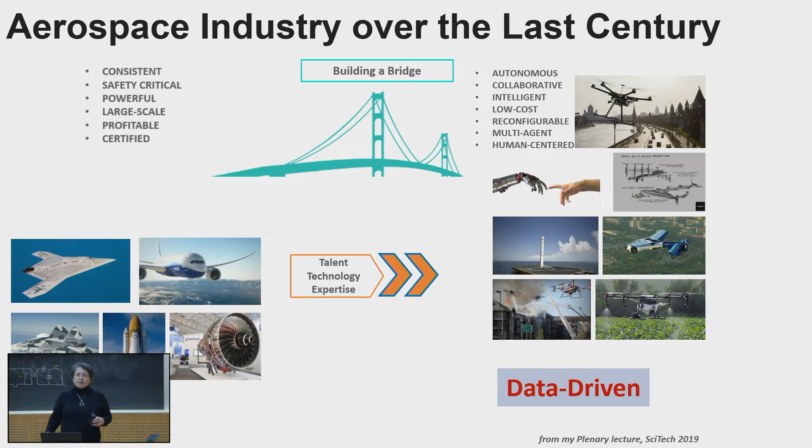This was driven by the data revolution, I guess, because CPUs and GPUs became cheap and available. That promoted lots of developments in the machine learning community, in computer science. Some of these scientists reinvented control methods within their own disciplines, and the landscape overall for our research changed fundamentally. This has become a new reality for us.

So what did we observe coming from computer science? We observed very impressive empirical demonstrations. The animation you see on the left, of a humanoid robot falling, collecting data, learning, falling again, collecting, learning again over a few months, gained more than 10 million views on YouTube. The Rubik's cube, or that kind of vision-based navigation in complex terrain, everything just proved the fact that many of these machine learning methods work very well empirically.

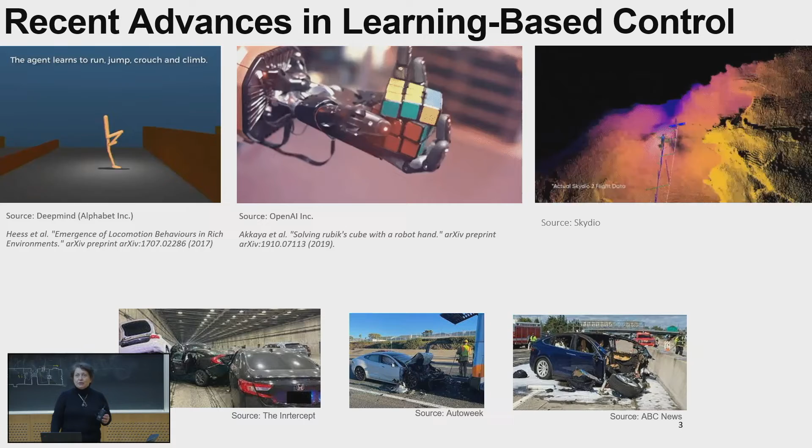And yet, on the other end, we see some of the accidents that have costed human lives. So there is a big gap here, between what's possible, what's provable, and what's guaranteed.

Obviously, when we deal with safety-critical systems, we have to keep in mind that collecting safely large amounts of data and using it in real-time online applications, especially when vehicles are operating at high speeds, can be just dangerous and not possible. The accidents can be catastrophic, deadly, cost human lives. That's why safety must be guaranteed by architecture.

So keeping this in mind, let's see what we have. We always have complex dynamics, uncertain models, uncertain environments. On one hand, we have control theoretic tools that ideally serve the purpose of structured models, parametric uncertainties, deterministic representations. On the other hand, we have data-driven machine learning tools that are good for general models, less restrictive assumptions, unstructured uncertainties, stochastic representations.

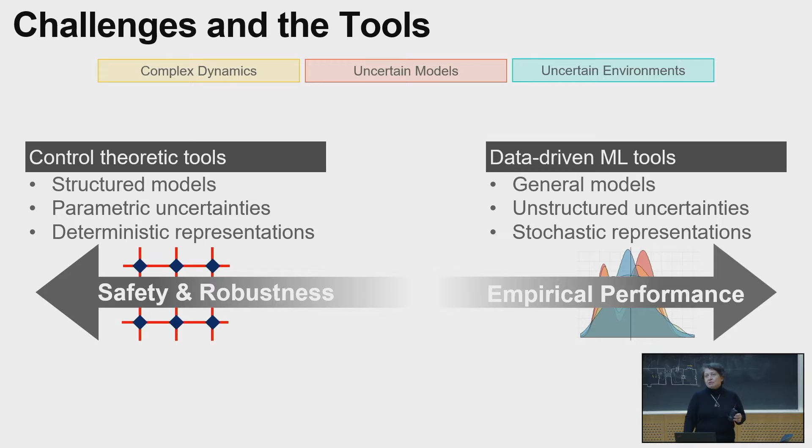So safety and robustness on one end are guaranteed within a very conservative setting quite often. And on the other hand, the empirical performance is just irresistible, right? You get attracted to achieving this type of performance level. So how do we bridge the divide?

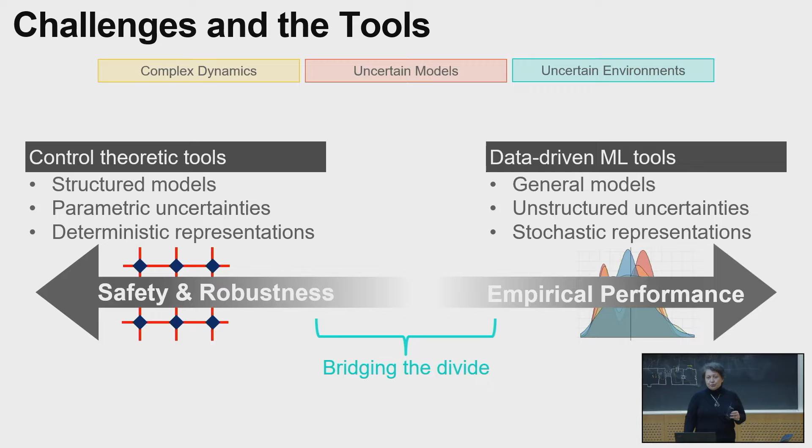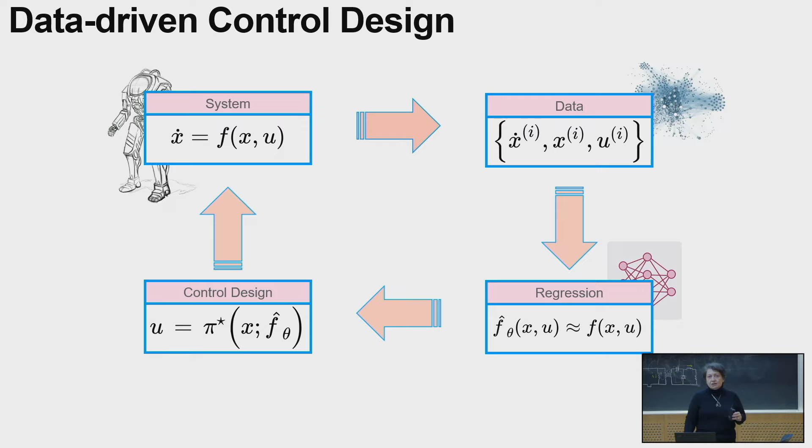So let's go through a typical data-driven control pipeline. Given a system, we can collect its data through some data logging policy. Then we build a regressor using the data. The regressor is used to derive an optimization algorithm to come up with a control policy that gets applied to the real system. This data-driven control design pipeline is obviously distribution dependent.

The data logging policy depends upon the system, and our data logging policy depends upon the sensors available, how frequently we would like to sample, and other laws that we define depending on the particular application. Data gets characterized by distribution, so we get training data and characterize it by some distribution that's used in building the regressor model, and then there is the optimization that produces the control policy.

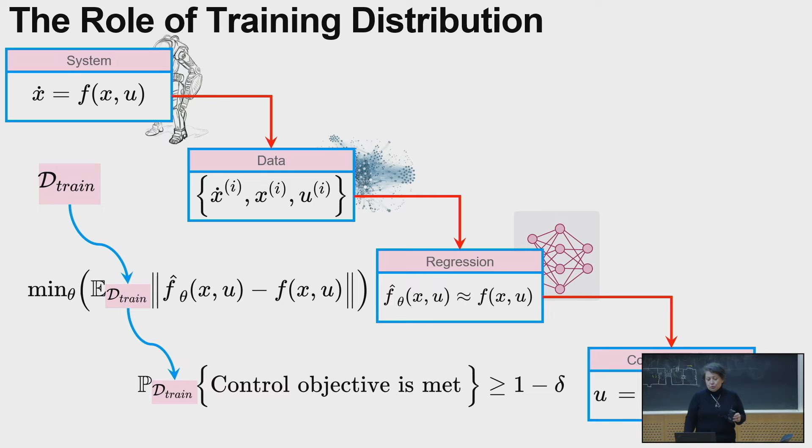When we get to apply to the real system, here is what happens. We minimize an expectation based on training data that helps us achieve a control objective. But when we apply to the real system, there is always a distribution shift. The distribution shifts can be characterized by two types of uncertainties, epistemic and aleatoric, as referred to in the machine learning community, where epistemic pertains to system uncertainties, modeling uncertainties, and aleatoric are the environmental uncertainties that we have less control over, or no control.

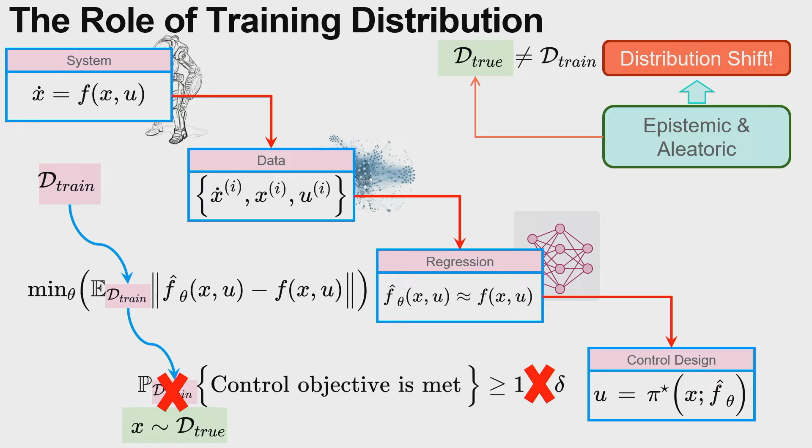So these distribution shifts render our control certificates invalid. Our control objective may not be met. So we're interested in robustness to distribution shifts.

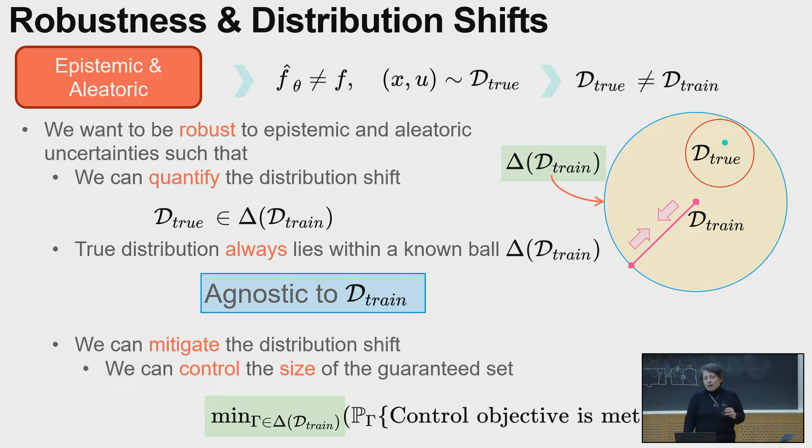So we want to be robust to both epistemic and aleatoric uncertainties, and we want to be able to quantify the distribution shift. We want to make sure we can have ambiguity sets around the training data, so that the true distribution during the operation of the system always lies within a known ball. And we want to be agnostic to the training data so we can mitigate the distribution shifts, and we can control the size of the guaranteed set so that the control objective can remain valid within this ambiguity set.

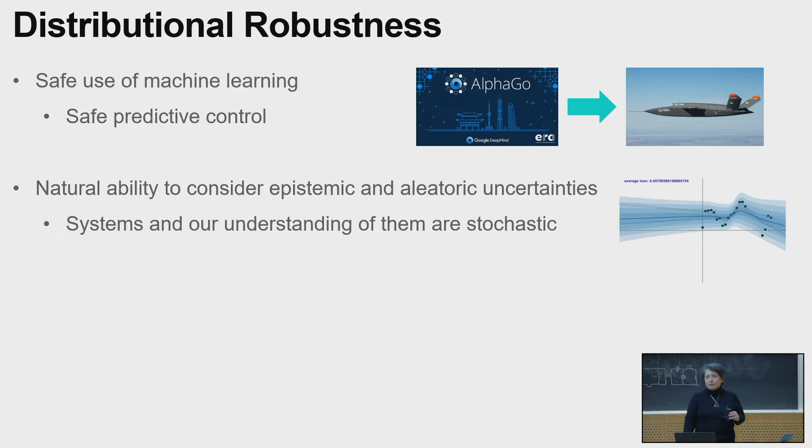Why is it important to have distributional robustness guarantees? It can give us the opportunity to do safe predictive control. This type of language is our natural ability to consider epistemic and aleatoric uncertainties, and systems and our understanding of them truly have to be stochastic. The design principles for these distributional robustness guarantees can help us merge the design space with the test space.

Talking of the aerospace industry again, flight controllers deployed on big airplanes are designed in a deterministic setting around a large gain-scheduled flight envelope. There are robust adaptive augmentations, and gain and phase margins are checked and tested in Monte Carlo simulations with uncertainty distributions that are stochastic in nature. To merge the design space with the test space, our research can play a pivotal role.

Distributionally robust control is not new. There is a rich literature here under certain sets of assumptions when the system operates around data close to its training distribution, with different types of control problem formulations, either in path-following setting or in cooperative setting. I don't want to go through the details of this.

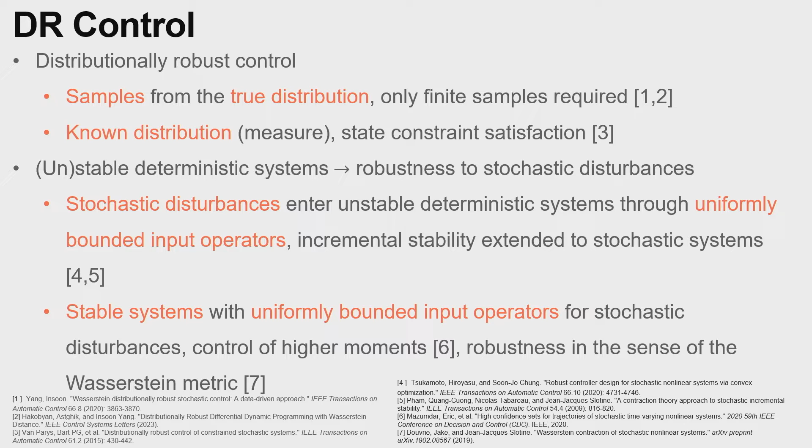I just want to focus quickly more on our research. So what's the setting? We have a regressor built from the training data distribution. It's optimized for a control policy and gets applied to a true system that, during its operation, faces data that might not have been used in the training distribution. So we have distribution shifts. We want some type of robust adaptive augmentation that can help us mitigate the distribution shift, so we can be distributionally robust and also predictable.

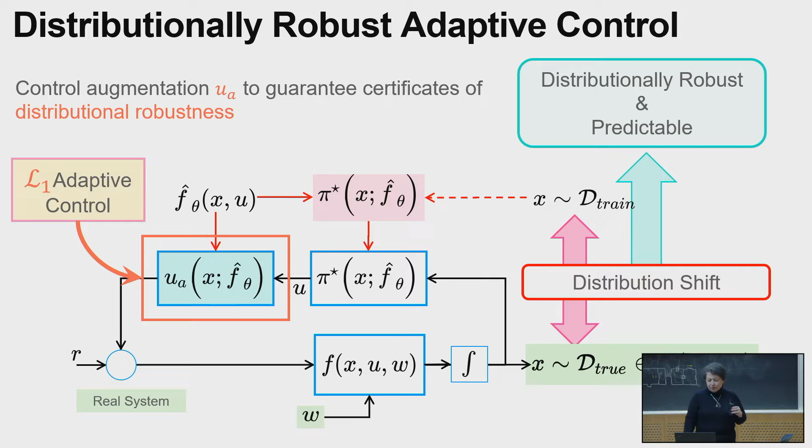Here is where we'll be using our L1 adaptive controller, which I had the opportunity to present at MIT twice over the last maybe 2 decades, or maybe 3 times, once also online. I'll just go briefly through it.

The L1 adaptive controller is a type of control architecture where the estimation loop gets decoupled from the control loop through a low pass filtering structure. This helps us have a priori predictable performance and robustness guarantees, and to tune the controller systematically.

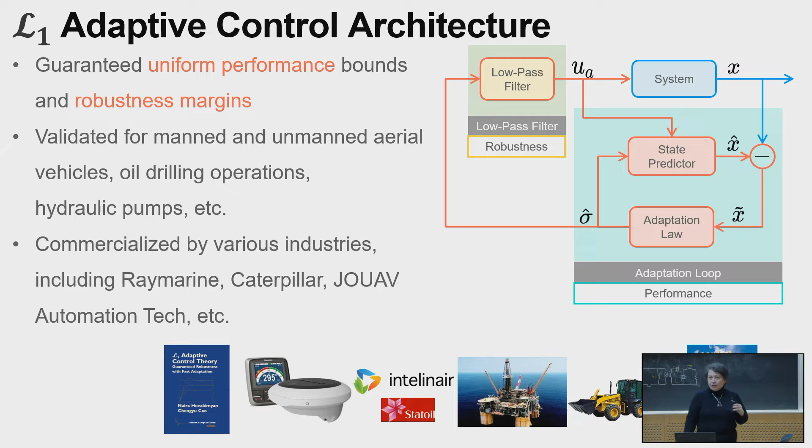So the key feature of the architecture is the decoupling, and it helped us transition the control technology to different industries, including Raymarine Evolution Autopilot, hydraulic pumps of Caterpillar. We tested it on an experimental rig at Statoil and many other aerospace applications and different industries. I won't go through the list now.

So the key idea is the decoupling of estimation and control loops, which subsequently leads to decoupled performance bounds—one inversely proportional to the rate of adaptation, and the other proportional to the low pass filter bandwidth. The architecture relies on decoupling of estimation and control loops, while the analysis relies on small gain theorem and Lyapunov stability theory, which have a long history of being well-exercised, well-established methods for provable certificates in safety-critical systems.

We first came out with the L1 adaptive controller back in 2004-05 when we were trying to address some of the pressing challenges that model reference adaptive controllers had. We got the opportunity to test it on NASA's subscale 757, a 5.5% model at NASA facilities known as the AirStar model. We were able to hold the aircraft in stall and post-stall conditions.

Subsequently, it led to lots of collaborations and joint papers with Raytheon, Boeing, and many other companies—commercialization efforts, as I mentioned. We also worked with Eurocopter on testing it on their helicopter model.

Transition efforts: in 2015, one of my former students called me from test pilot school at Edwards Air Force Base, offering us the opportunity to test it on a manned aircraft with people on board. This is where pilots get trained to get their license for piloting aircraft. So this was already a completely new milestone with a different, more serious level of approach, because we were going to have people on board.

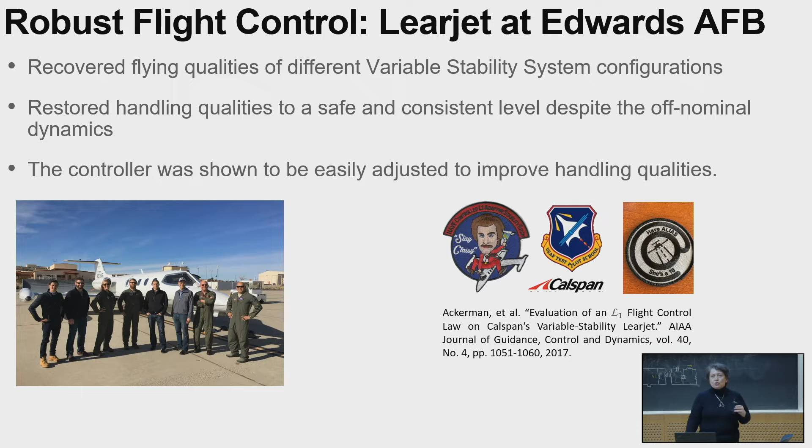So this is pretty serious, and during the 4 months of preparation, we had long 10-hour calls bi-weekly with the Air Force team, and some marshals had to sign paperwork. So we got approved to test accidental scenarios where we could show that we can recover for safety.

We got some press out of it. Aviation Week wrote about us. We got the F-16 VISTA aircraft, which we were not allowed to publish or show. In 2018, we got our last opportunity to try, after which COVID hit, because these tests were only happening biannually. So I'll just show this flight test.

Let me see if we have enough voice. So in 1967, there was an accident where luckily the pilot survived. This accident data was loaded onto a Learjet to force it to mimic this accidental scenario, and to see what happens to the aircraft. Can the pilots control it?

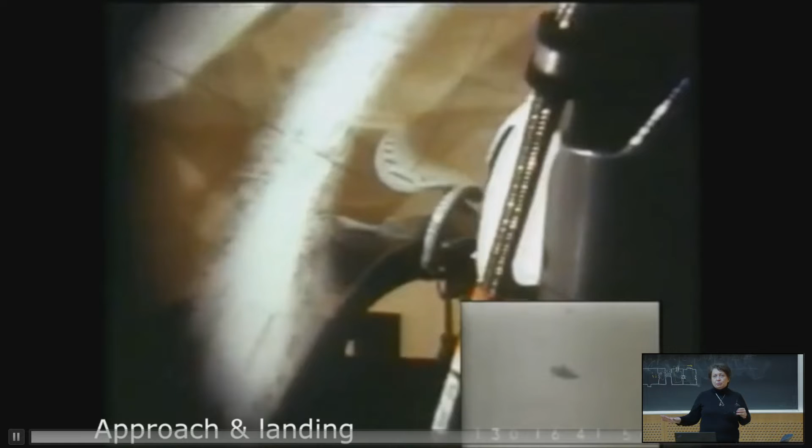If they cannot, the variable stability system shuts it down, and then they put the L1 adaptive controller to test for the same data. You will hear the pilots saying something is still left, and we were able to recover with the stochastic analysis and find the answer to it. Now listen to the pilot's audio. I hope we have audio here.

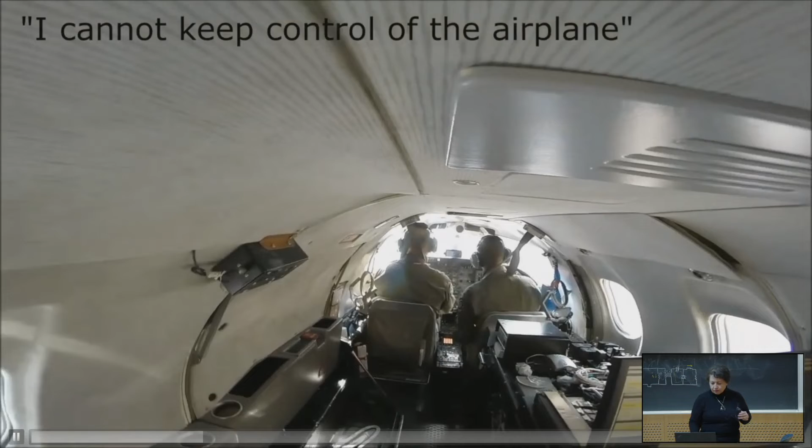So the pilot lost control, the VSS shut it down. Now they go into the same scenario with our controller.

Hey, test in 3, 2, 1, now.

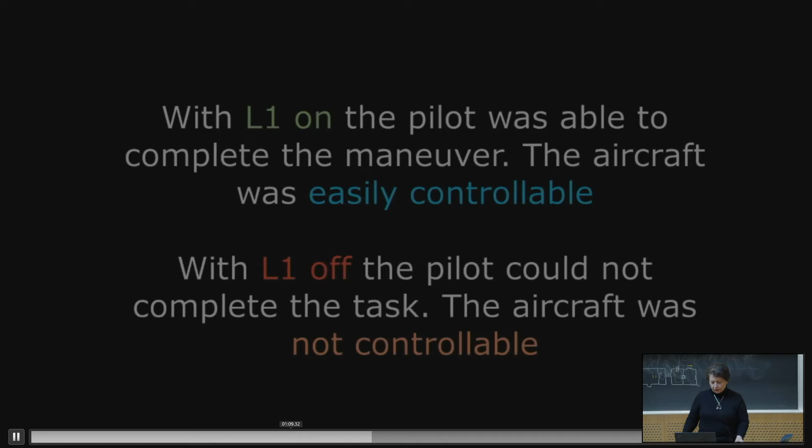Now they go into engine out scenarios, without pilot, with pilot, and with our controller. There is bank angle indication on the right of the screen.

Okay, power coming back. My hands up for 3, 2, 1, now. Controls fixed. And recover. And recovery. Power back.

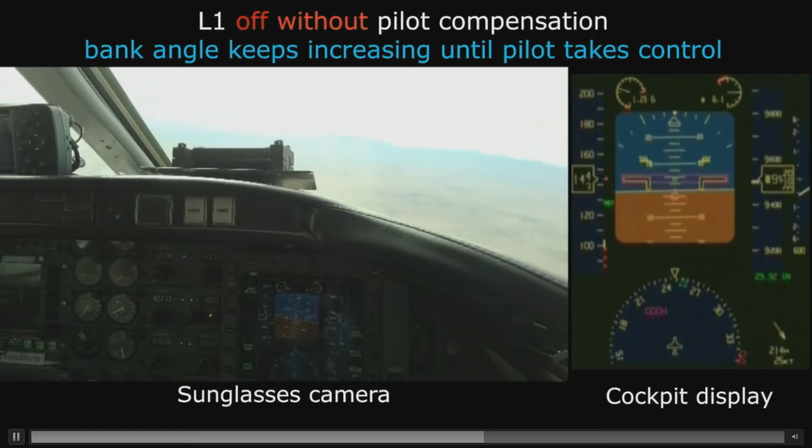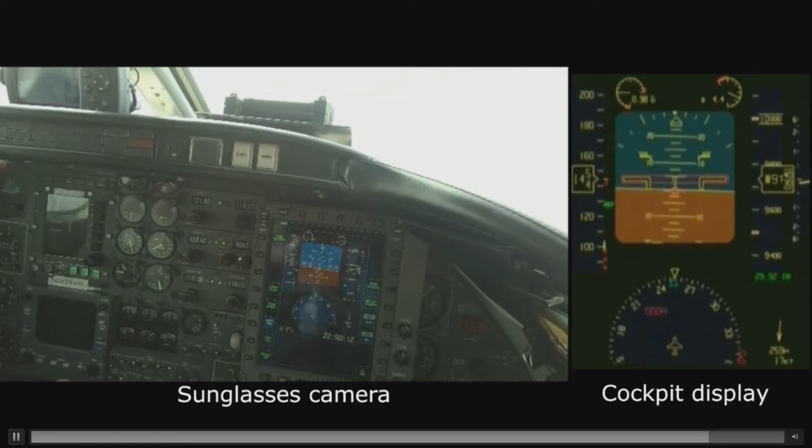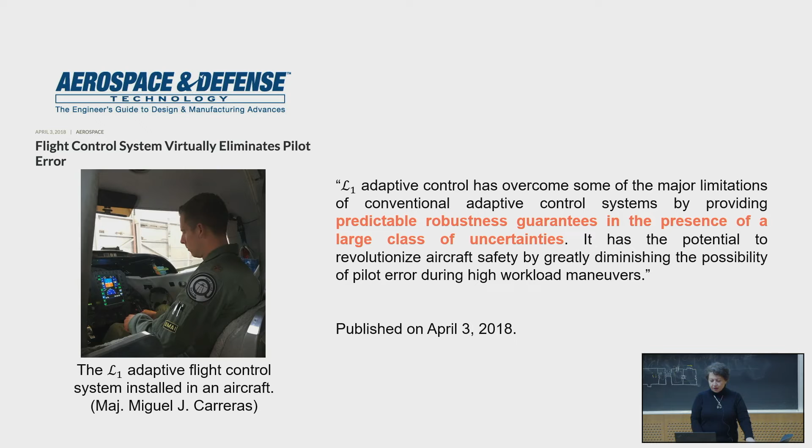So 3 degrees were left, and our stochastic analysis helped us to find out about this. We were on the front page of Aerospace and Defense Technology. Actually, for this one, I wasn't interviewed. For Aviation Week, I was always interviewed, so I got the message from the College of Engineering. It was great to see that the work could have impact for critical technologies, with lots of other applications.

For example, this one put us into the New York Times, like elderly care, and the focus here was on integrating human perception of safety, because engineering safety is about collision avoidance, but human perception of safety is different. The elderly care industry is growing because people now live longer and there aren't enough young people to work in nursing homes. We use virtual reality technology to test people's perception of safety, which is a lot more conservative than the actual engineering safety defined by collision avoidance.

This Cinderella cartoon was our inspiration for thinking of small technologies that can be ground robots or flying drones, to help humans. This was, of course, very futuristic, and that's why the New York Times captured it.

So they called on friends for cooperation because it increases payload. These are all communication control problems. And then there is the question of whether she feels safe in the presence of robots.

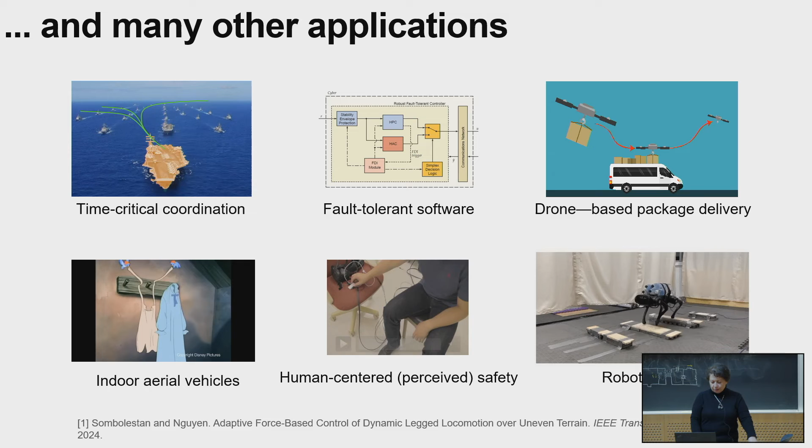This is an experiment that was done at University of Southern California. Here you see the dog running with a 3 kilo weight and falling apart, and here they are adding the L1 controller. How does it run? It's woke up, took a while, and it runs with 5 kilos and is not falling apart.

And we are not part of it, so it wasn't done in our lab. They just shared it with us, and we were happy to see and use it.

But then in 2018, I got invited to Georgia Tech, like I'm invited today here. And during my meeting with Evangelos Theodorou, who was one of the finalists of the Lockheed Martin and Drone Racing League AlphaPilot competition, he asked me if we could bring the L1 adaptive controller to this environment.

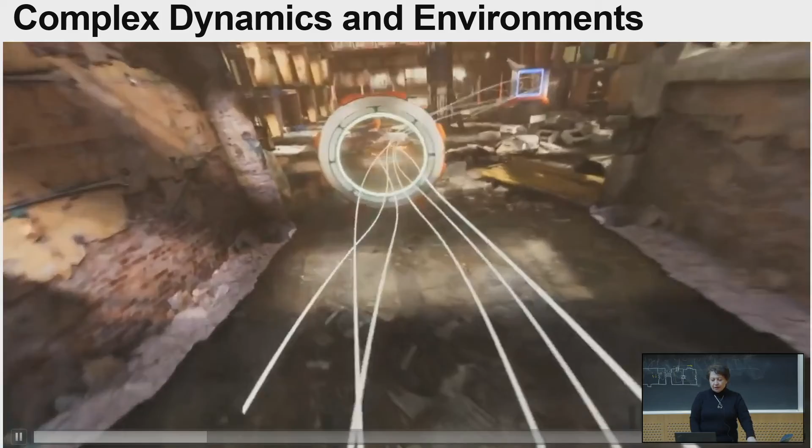It was immediately clear that we couldn't do it without extra work, because all I'd shown until now, the path was defined and we were following it. It's the big airplane flying, big flight envelope, or any other application we did—the path is predefined. Here there is continuous learning that has to happen, finding new ways, continuous replanning, and in this environment it was not clear how to bring L1 and make sure that it works.

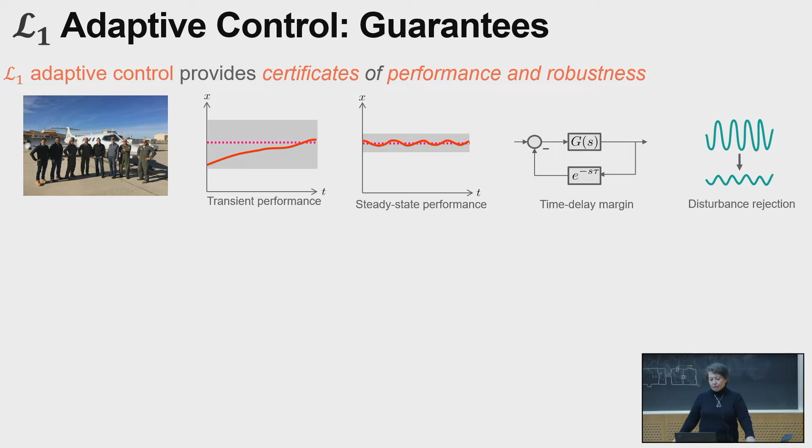So the L1 adaptive controller has provided certificates of performance and robustness in the sense of classical control: transient performance guarantees, steady state performance, time delay margin, and disturbance rejection. For these new environments, as the world around it changes, we need new forms of guarantees, appropriately defined for data-driven systems with stochastic representations and distributional guarantees.

So this brings me to the outline of today's talk.

So the first thing naturally that we did, we worked with Georgia Tech to bring L1 to their system. They had MPPI, which is Model Predictive Path Integral Control—it's model predictive control with a learning component. We tried to put L1 there to see if we could clear more gates by getting better tracking, and we did it empirically.

Then the question comes up: if we're flying in these cluttered environments, will the baseline gain scheduled linear controllers be appropriate, or do we need to look for new types of nonlinear controllers appropriate for cluttered environments? This brought us to control contraction metrics and contraction-based controllers that would give us a new class of nonlinear baseline controllers for these cluttered environments.

Then the question comes up: if we do this deterministically, can we add learning to it to make it even more sophisticated? If we learn the uncertainty and reduce the amount of uncertainties, we can guarantee better tubes for more precise performance. That brought us to defining a new framework for distributionally robust adaptive control, to get predictable performance in terms of certificates for distribution shifts and close the language barrier between data-driven machine learning control and robust adaptive control methodologies.

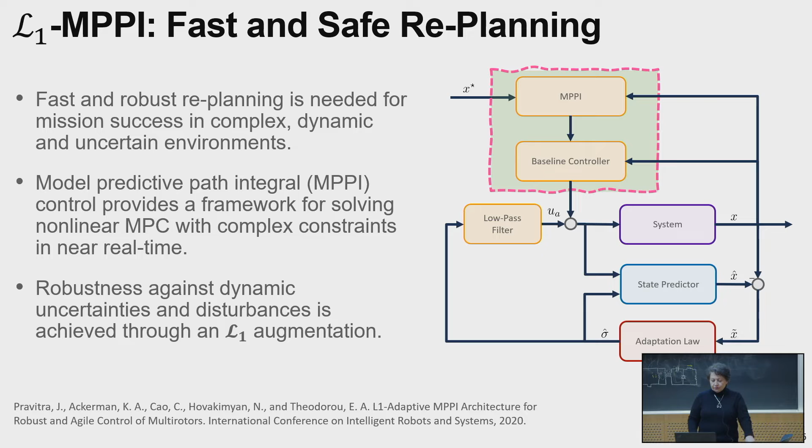Now, one by one, going to this model predictive path integral controller of Georgia Tech. We augmented it with the L1 adaptive controller to get guarantees for better tracking. So what does model predictive path integral control do?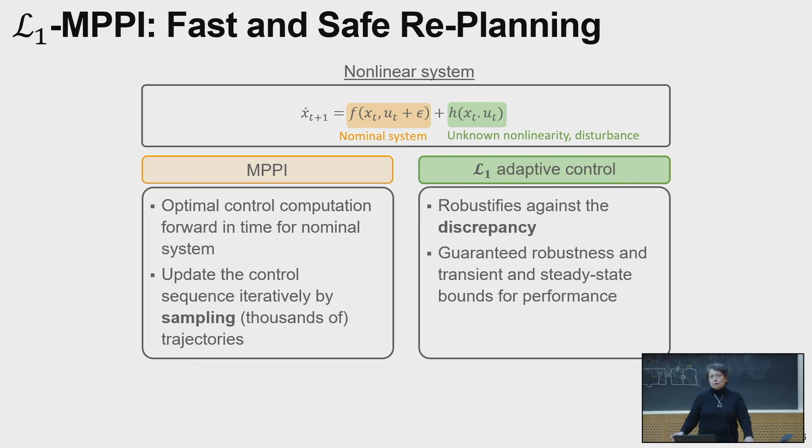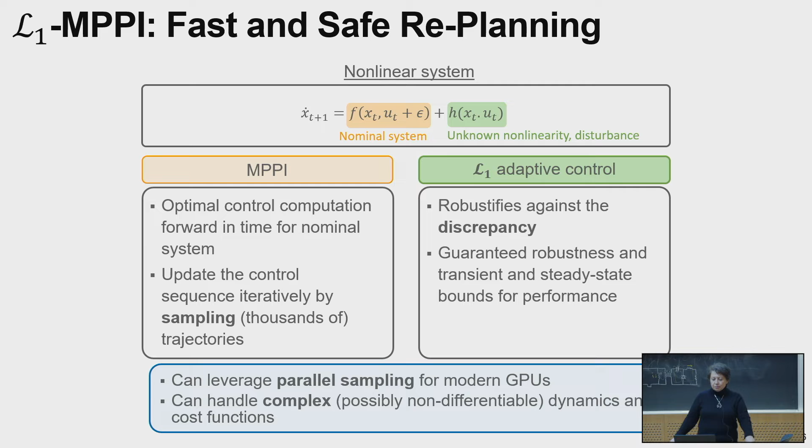It's a method for fast and safe replanning. Given an uncertain system, formulated in discrete time, the model predictive path integral controller is an optimal control computation forward in time for the nominal system, and it updates the control sequence iteratively by sampling thousands of trajectories. The L1 adaptive controller was compensating for the discrepancies between this nominal system and the real system. There is an opportunity to leverage parallel sampling for modern GPUs, and we can handle complex, possibly non-differentiable dynamics and cost functions. This paper was accepted in IROS.

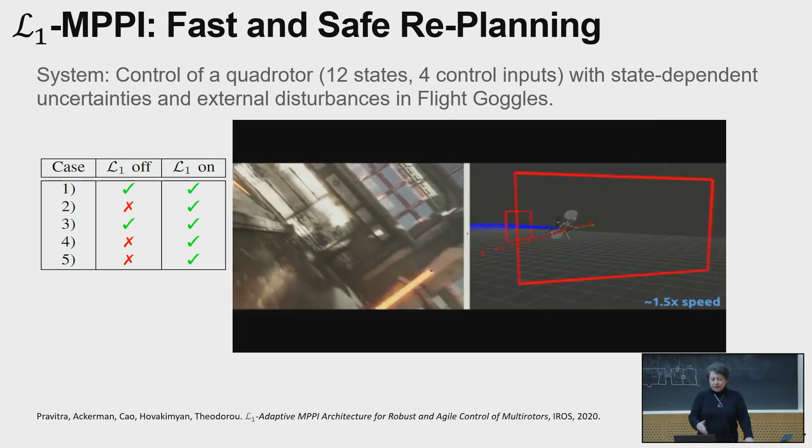Here is that simulation environment, and this happened in the year of COVID, 2020. Getting into the lab and flying anything like this would have been impossible, but luckily this simulation environment kept everyone busy and happy to work on the exchange. So we cleared some of the gates that were not cleared by the MPPI.

Now you will see with L1 on—although in the simulation environment it's hard to track, but trust me that the results with the real data are in the paper. It can be downloaded from IROS 2020.

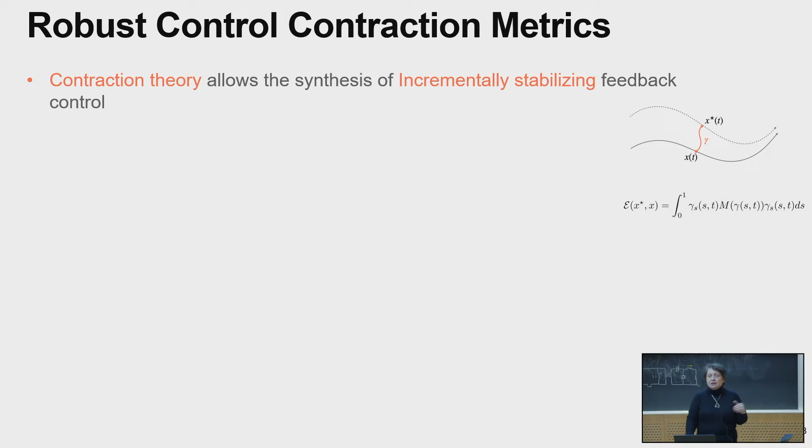And as I said, we went to study contraction theory a little bit to come up with nonlinear baseline controllers that can help us navigate in cluttered environments. Control contraction metrics parameterize Lyapunov functions on the differential space. We get convex conditions for synthesis that make it easily computable, and the Riemannian energy, defined through the geodesic length, serves as a Lyapunov function here and as a certificate subsequently.

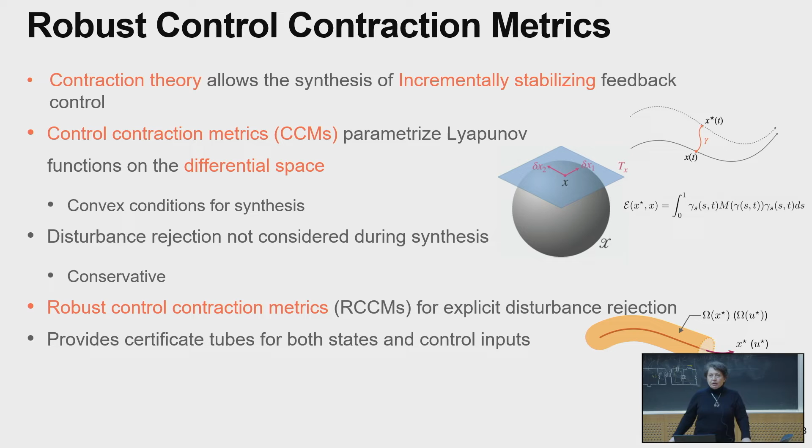So what we did: we extended it to have explicit disturbance rejection, and by then we were lucky—Marco Pavone was one of our collaborators on the NSF robotics grant called Syndrome for last mile parcel delivery. It was easy quickly to exchange ideas, get the right papers and collaborate. So we extended it to have explicit disturbance rejection and get tubes for the control signal and state variables simultaneously.

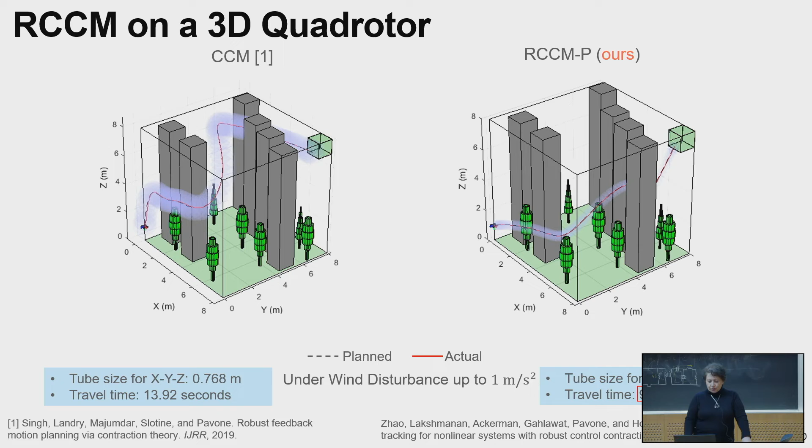We got a simulation environment to simulate it and do the comparison study. And here it is—here is that original paper. Jean-Jacques is also here with Marco. And this is the way we did the disturbance rejection and got...

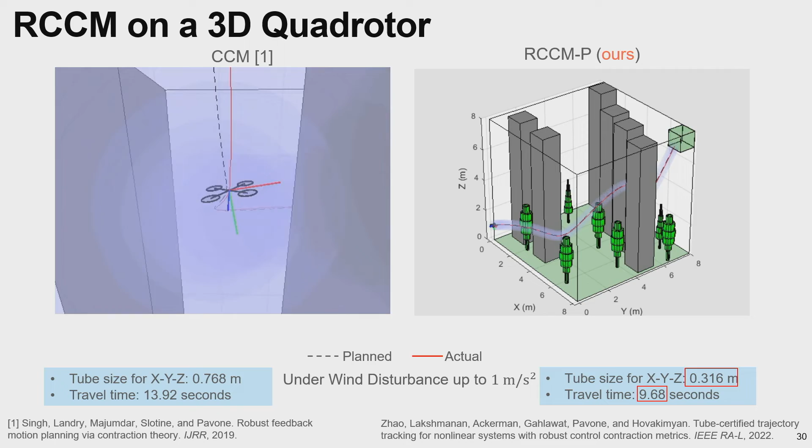So here, we reduce the time of travel to 9.6 seconds from 13.9 seconds. And the tube sizes get reduced.

With this type of baseline controller, naturally we put everything together. We have contraction theory that gives us safety tubes with incremental stability properties, actually incremental exponential stability properties. We augment it with L1 adaptive controllers, add a Gaussian Bayesian learner there, and get some guarantees already in a probabilistic sense. If we put all this together, we get safety certificates in the form of tubes for this contraction L1 GP framework, which enables safety during learning.

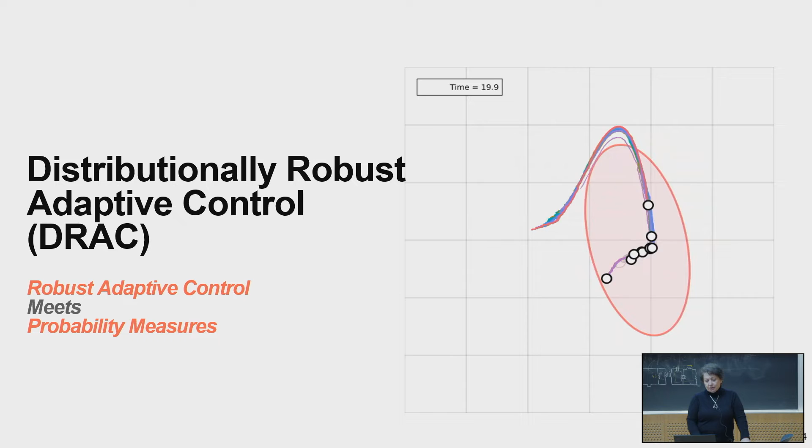This brings us to the framework of defining distributionally robust adaptive control, where we can merge the language from both domains and enable more aggressive applications and have distributional robustness certificates.

So what are we interested in? A general consolidation framework of machine learning and control must contend with a language barrier. They talk different languages. A prototypical machine learning pipeline can be described roughly like this: you have data, you have a model class that you choose, and you minimize this expectation, which we call empirical risk. It's an expectation over the training data that relies on the distributions that form our training data.

These are empirical distributions given from past operations, simulations, and so on. What guarantees can we expect from the machine learned models? A trained model, an optimized parameter set, learned model certificate, which we call R, referred to as model risk in machine learning literature. And the performance guarantees here are very much distribution dependent.

And there are extensions to Wasserstein ambiguity sets around empirical distributions. So there's quite a bit of literature here. So using what machine learning can provide, how do we ensure predictable and safe control?

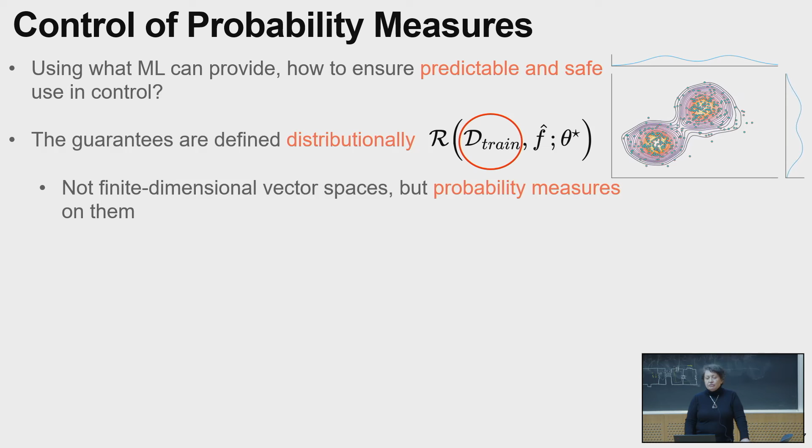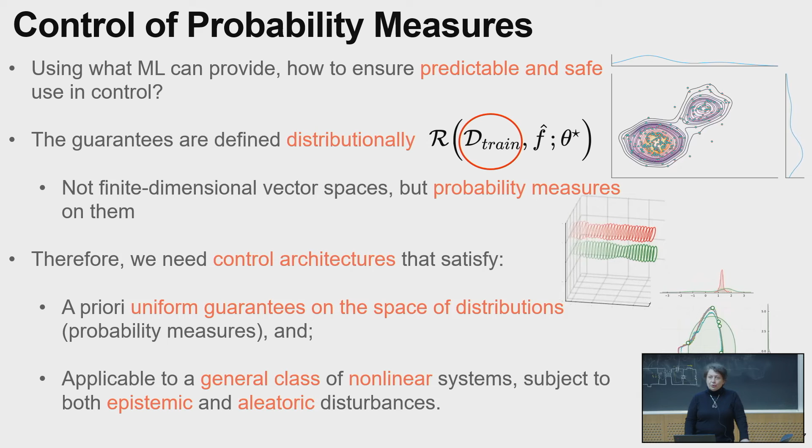The guarantees are now defined distributionally if we follow this framework, not on finite dimensional vector spaces, but probability measures on them. Therefore, we need control architectures that satisfy a priori uniform guarantees on the space of distributions and can be applicable to a general class of nonlinear systems subject to both epistemic and aleatoric uncertainties.

So we look into the Ito stochastic differential equation, the description of a general class of nonlinear uncertain dynamic systems. And the representation can be done either with sample paths, trajectories, or distributions that you see around the sample paths. So there is incomplete knowledge of the vector fields, which are the epistemic and aleatoric uncertainties.

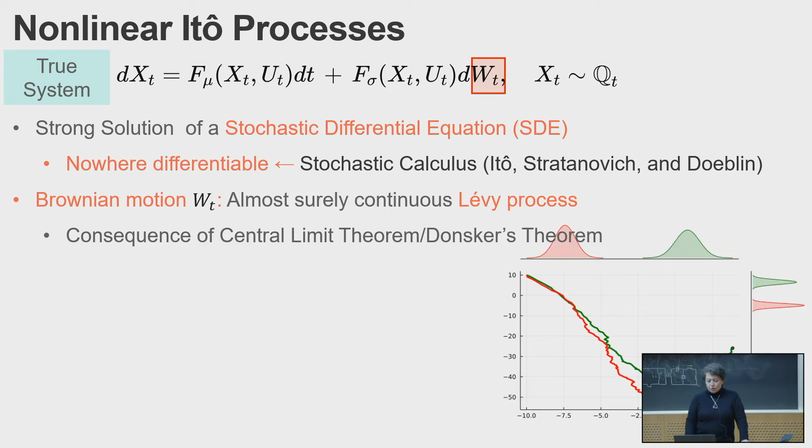So if I go forward, WT is a Brownian motion, we'll quickly define it. Given the true system, XT is a strong solution of a stochastic differential equation, nowhere differentiable. WT is a Brownian motion, it's an almost surely continuous Levy process. F mu is the drift term, that's the average mean behavior of sample paths, while F sigma is the diffusion term, which characterizes the randomness of the sample paths via correlated and state multiplicative injection of the Brownian motion given by WT.

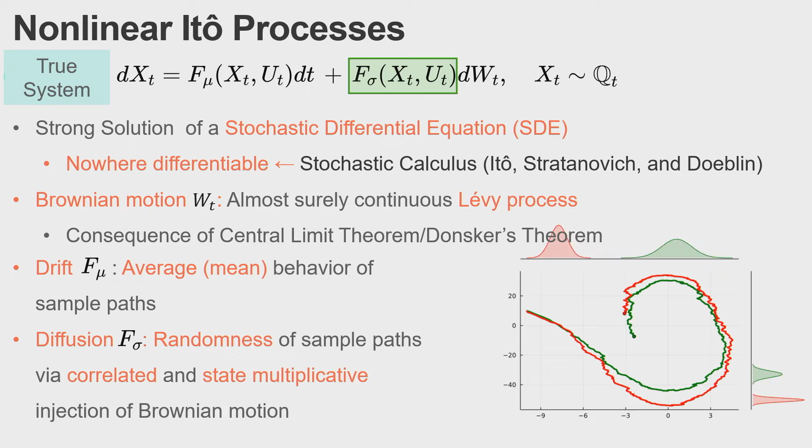Looking into the true system, the uncertain drift term can be represented as a known component plus an unknown component, matched and unmatched uncertainties. The uncertain diffusion term can also be decomposed into a known component and unknown component, and we have a noisy control channel here through UT-DWT. If we have only the drift term, we'll be back to nonlinear deterministic ODEs, because the Brownian motion enters through the diffusion term.

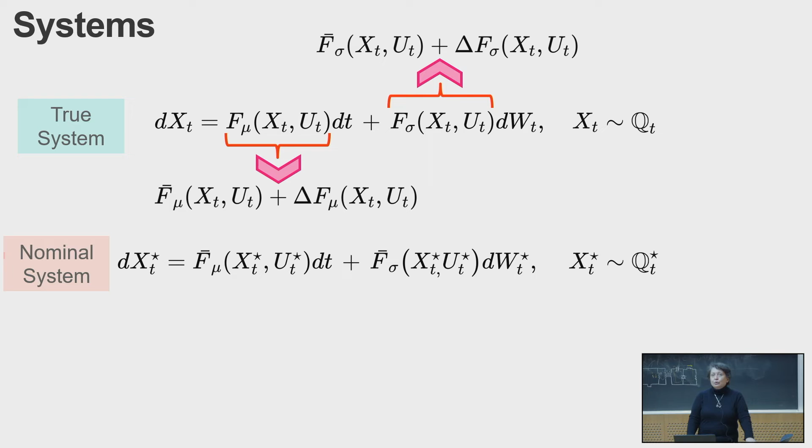If I look into the true system and understand how these drift and diffusion terms are constructed, I will isolate a nominal system which has only the known components. But yet I have to assume that there is a Brownian motion associated with the nominal system, and that these two Brownian motions of the nominal system and true system are independent. Otherwise, I don't have a good problem formulation here, a fair representation of the reality. So there is a distribution shift between the two distributions, between the true system and the nominal system, that we are interested in mitigating, and that has to do with these uncertain terms.

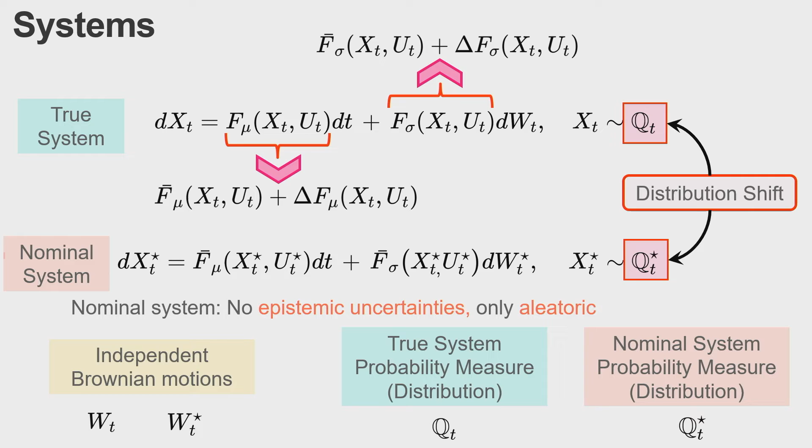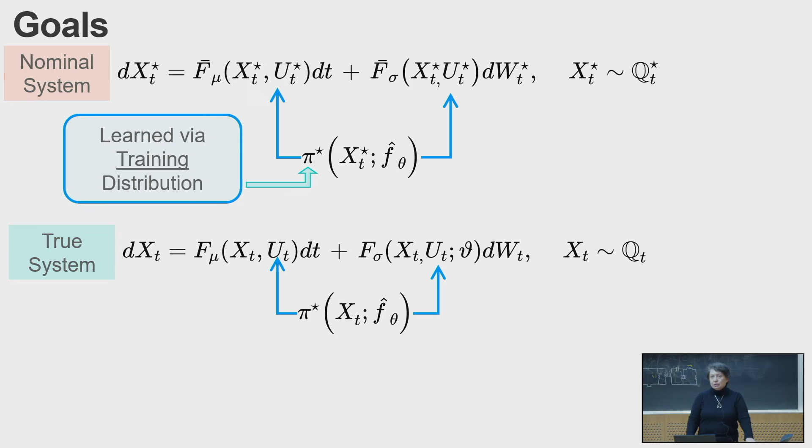Our goal is to apply our learned policy, available through the training data distribution and the optimization of the regressor we did, while applying the optimized policy to the true system to mitigate distribution shifts. Since guarantees of safety and predictability defined on the training data distribution won't be valid for the true system, we design a feedback augmentation called pi A, the adaptive augmentation, so that the true distribution remains uniformly bounded around the nominal distribution, quantified for upstream distributionally robust planning and control.

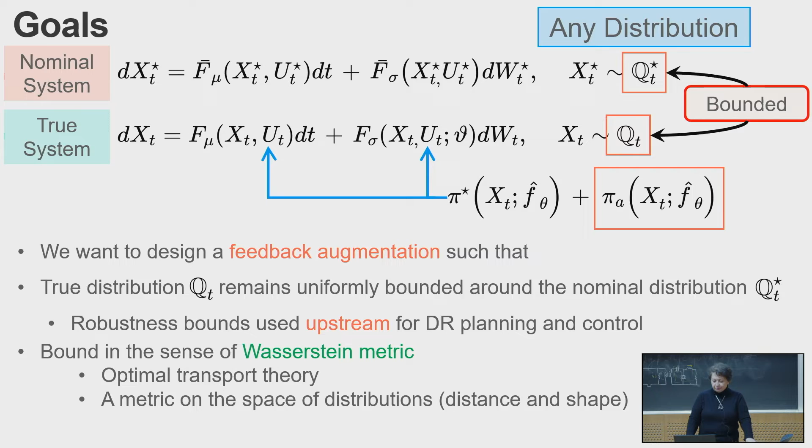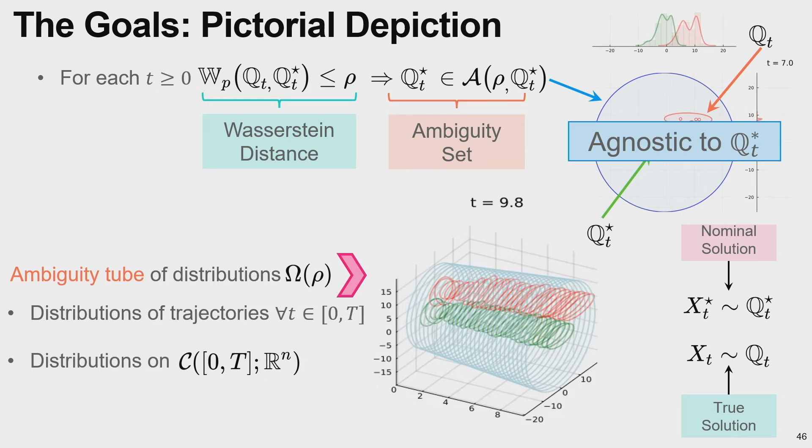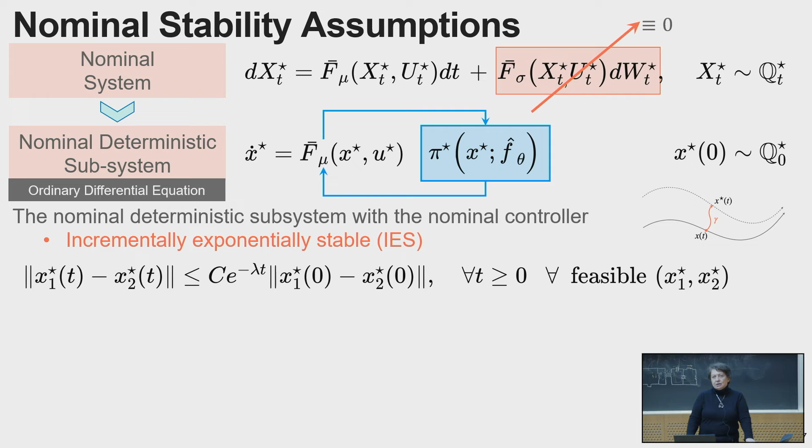We need some assumptions on the nominal system to begin with. If I take out the diffusion term and the Brownian motion, I'm left with a deterministic system on which I want incremental exponential stability type assumptions with its associated Lyapunov function as a certificate. So we assume existence of an incremental Lyapunov function for the nominal deterministic subsystem used in this process.

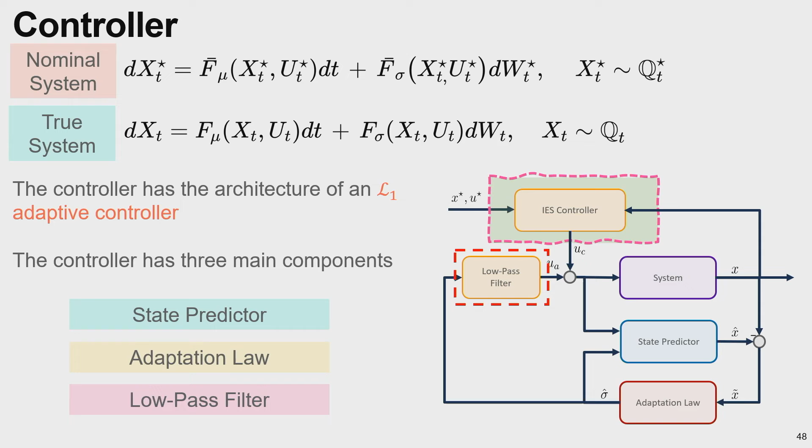The L1 adaptive controller has its three components, like we always said: the state predictor, adaptation law, and low pass filter. The key here is that we take the deterministic L1 adaptive controller designed around the nominal system in its deterministic sense, and apply it to the true system with stochastic uncertainties, these distributions, and analyze the performance of this controller if it's driven, for example, by colored noise. We retain the identical structure and architecture for L1 adaptive controller for nonlinear deterministic systems.

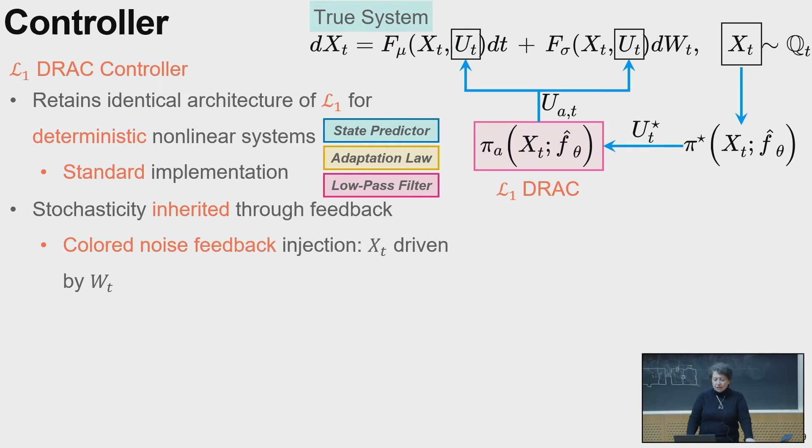It's stochastically inherited through feedback that comes like colored noise feedback injection through the Brownian motion. That's the real world. We have a deterministic model from a textbook around which we designed a deterministic controller with all its certificates, and then we apply it to the true system, acknowledging its true nature. So our predictor is perturbed by colored noise, and we need to give guarantees in the space of distributions. The feedback design remains in the standard state space, but the guarantees we now provide are in the space of distributions, or probability measures on the state space. So we do not assume unrealistic distributional feedback.

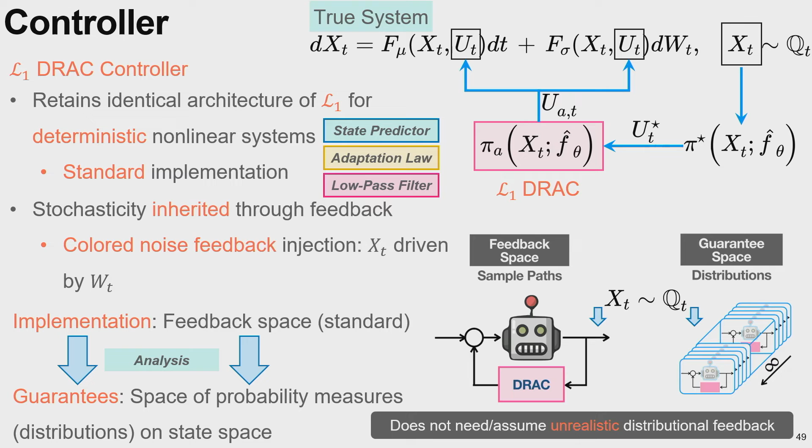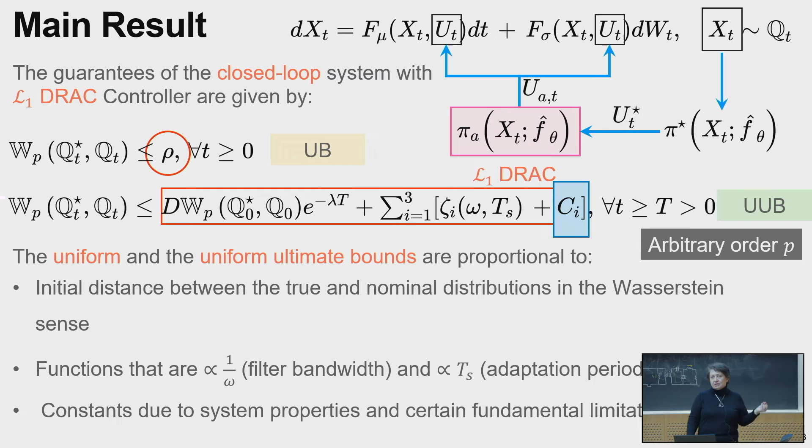This C3 is what, if you remember, the pilot was saying there is still something there, three angles that were left. Now we found why they were left, and without doing this analysis, we wouldn't have recovered that. So the key point in the proof is that we use the transient bounds of the L1 adaptive controller.

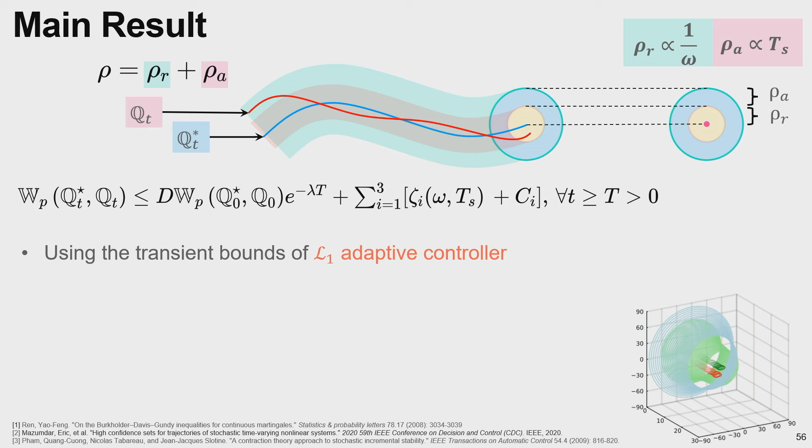We get the bounds on the Wasserstein norm in these inequalities. The term C1 is there due to unmatched uncertainties that will always be present in the real world. C2 is due to the independence of the Brownian motions, because the nominal system in this setting has to have its own Brownian motion completely independent of the true system, and it's lower bounded by some constant which will never go to zero. It's not present in the deterministic system. The C3 term is due to noisy control channels, which is also an assumption of the real world that we have to meet.

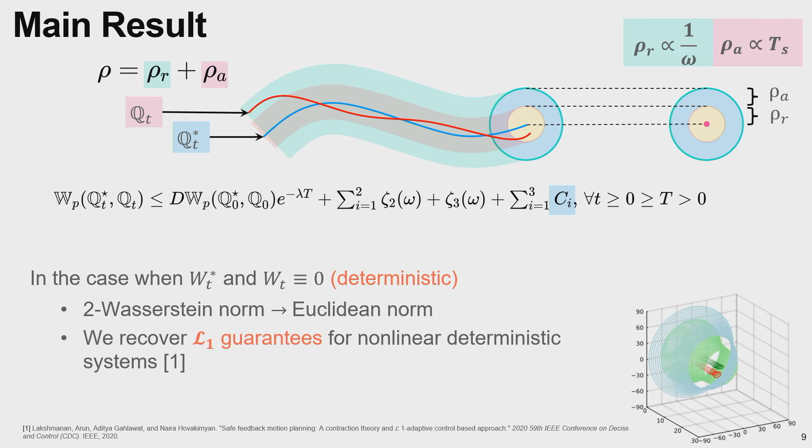In the case when the Brownian motions go away, we're back to the deterministic scenario. We recover the L1 performance bounds that we had in the deterministic setting, because the 2-Wasserstein norm collapses to the Euclidean norm.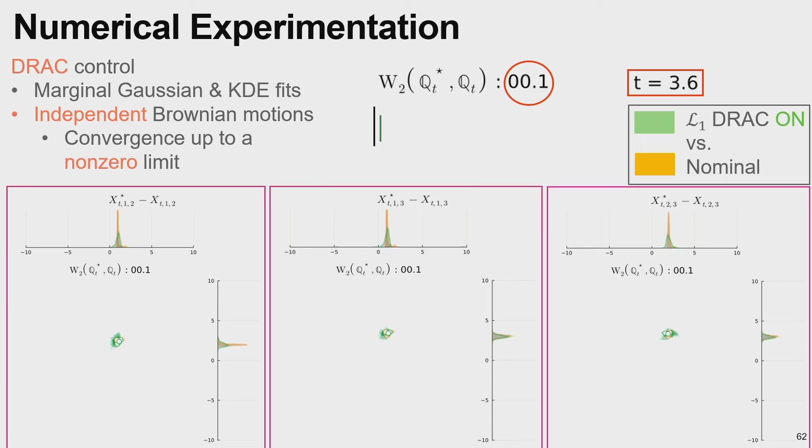Here are the comparisons visualized in 2D: in the absence of the controller they diverge, in the presence of the controller they converge, and here is the visualization of the metric at 0.1.

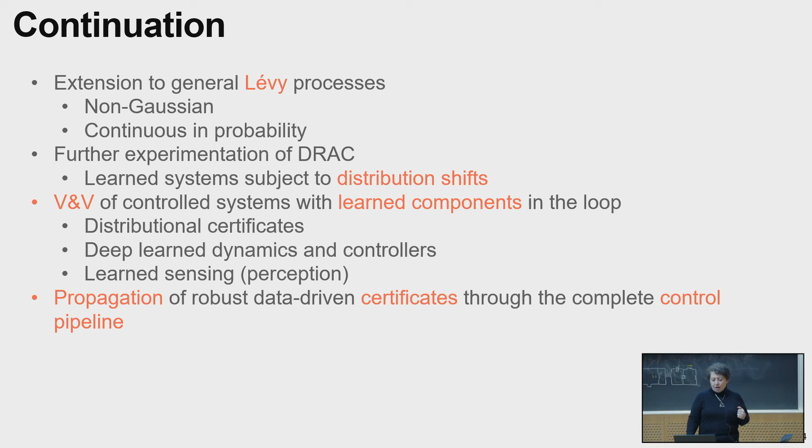Here are lots of extensions coming up. We can extend this to general Levy processes, and do further experimentation of this controller with learning elements, because right now this was just the stochastic analysis of the L1 adaptive controller applied to real systems. We can bring in learning components here, future work to enable verification and validation of control systems with learned components in the loop. Distributional certificates, deep learned dynamics and controllers can be studied with this framework, and propagation of robust data-driven certificates through the complete control pipeline for distributional robustness, for planning and control.

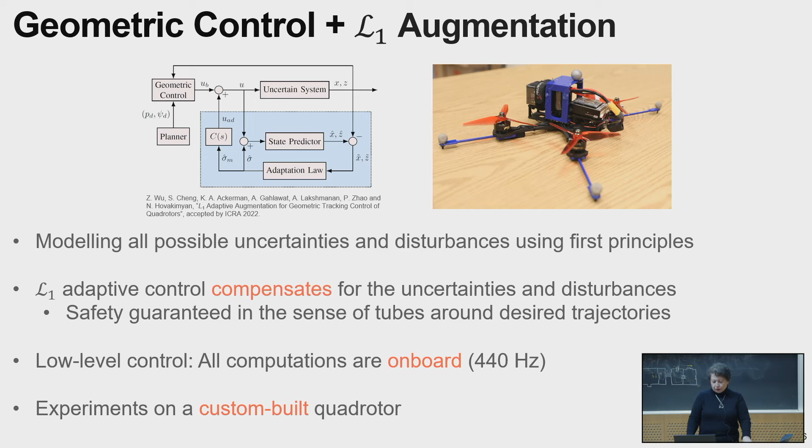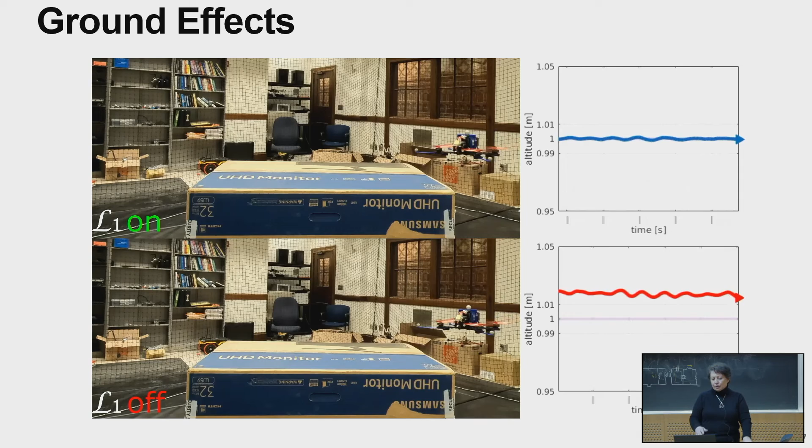Here is when it flies over a big box for ground effects, and you see without the L1 adaptive controller it has significant instability due to ground effects. With L1 you see that small buzz that's always there. If we had not done the stochastic analysis, we would just say the solutions are bounded, but now we know how they behave.

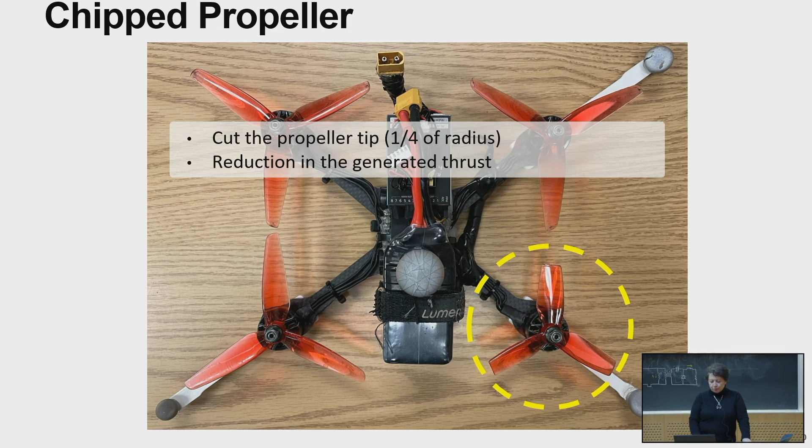So we go to the next one: a chipped propeller. With a chipped propeller there is significant thrust reduction, so it flies and is almost about to crash. We turn on the L1 adaptive controller to stabilize it, and when we take off the L1 adaptive controller, it crashes. You will see now how it goes into crash.

Then we do four different chips, four different propellers, and with four different propellers it's highly unstable because it's highly asymmetric. When we take off the L1 adaptive controller, it goes into unstable oscillations, and then we put on the L1 and it gets back to stable hovering.

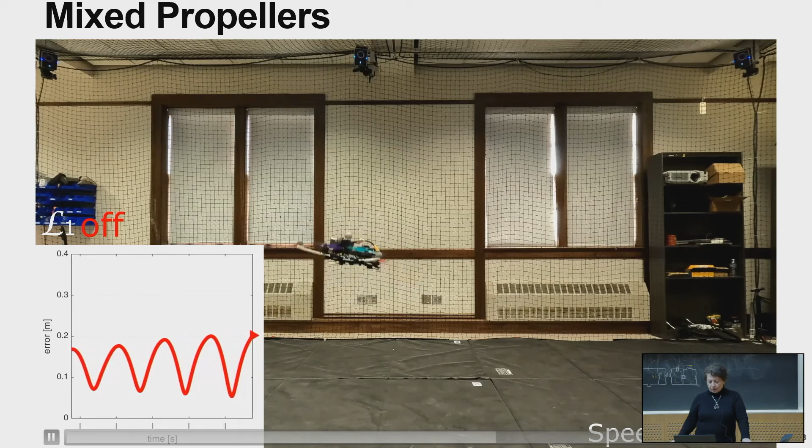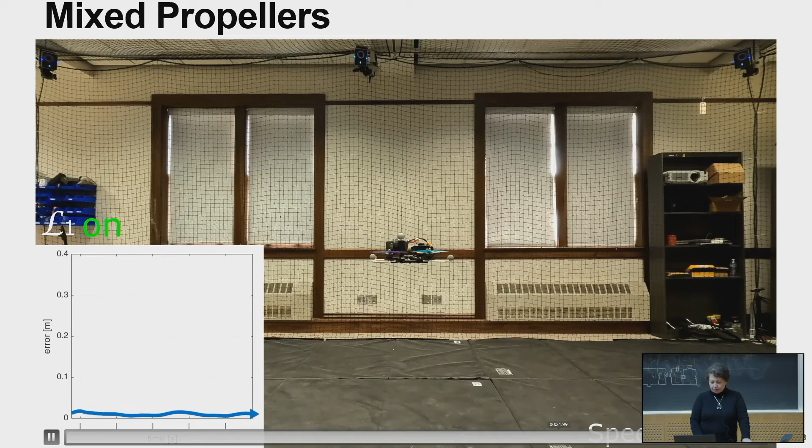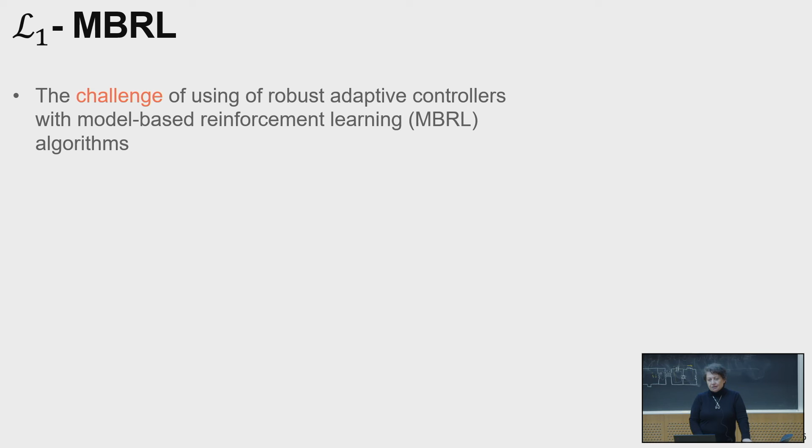So the challenge of using robust adaptive controllers with model-based reinforcement learning control algorithms is characterized by the fact that the robust RL algorithms learn models that are highly nonlinear. Parameters of the neural networks do not equal the true parameters of the physical system. Nominal models produced by this MBRL algorithm are not amenable to control tools.

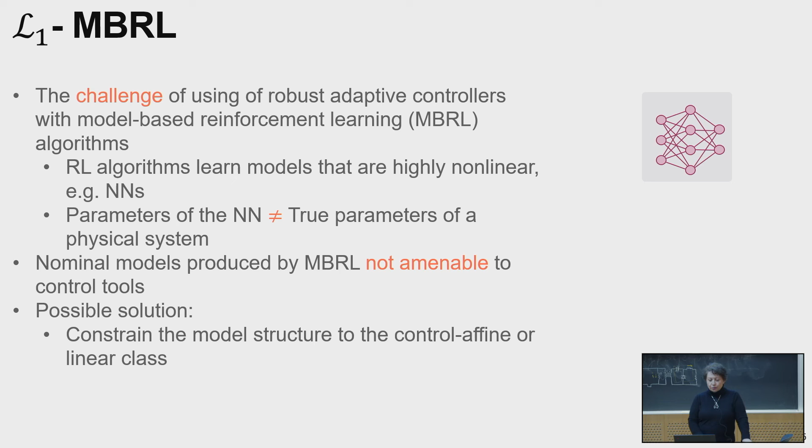So the possible solution is to constrain the model structure to control affine or linear class, but then it comes at the price of sacrificing the performance. So what did we do? We added a kind of model affinization block and the L1 adaptive controller. Very long paper with detailed proofs, I'm not going through this, obviously.

The design requirements that we impose: we cannot touch the high-level MBRL algorithm. It cannot be changed, it's industrial, it's innate. And no additional requirements from the high-level MBRL algorithm are taken into consideration.

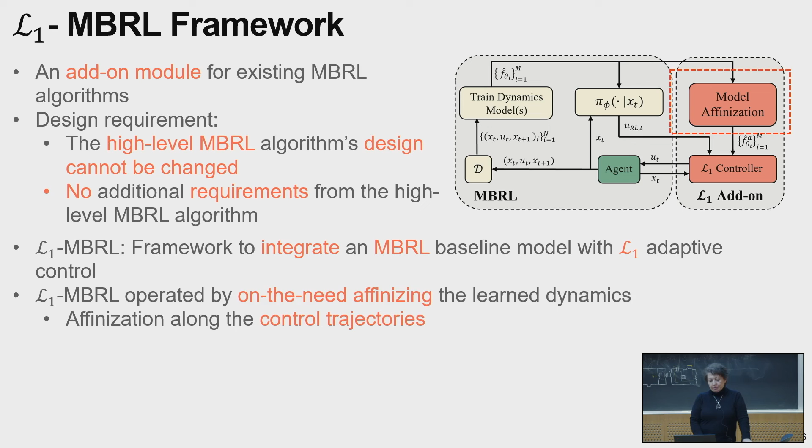So the framework is to integrate an MBRL baseline model with L1 adaptive control and to show performance improvement for cases when the data was not seen or used during the training. So it's operated by on-the-need affinizing the learned dynamics and affinization along the control trajectories, and it's implemented on the affine dynamics, the L1 adaptive controller.

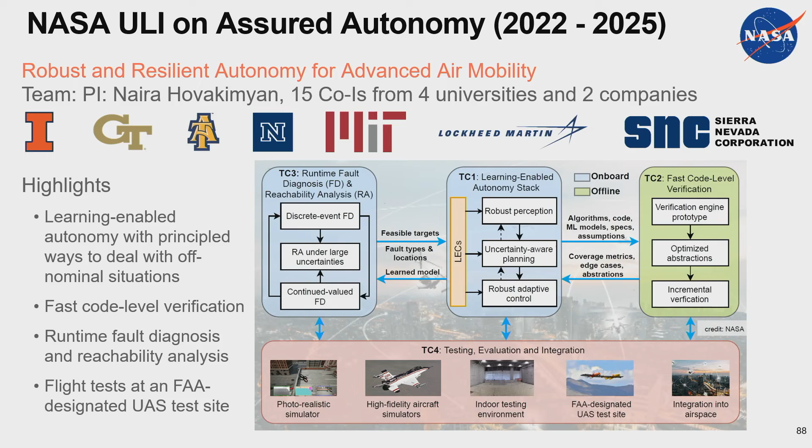So what do we want to do? We started from the fact that we wanted to bridge the divide, but we also want to keep in mind the fundamental limitations. And why fundamental limitations? If I go back to 1989, when the first Bode lecture was done at CDC, Gunter Stein from Honeywell recalled the X-15 crash in 1967, which was one of the most successful flight test programs at NASA, but the pilot Michael Adams was killed.

As the later analysis revealed at Honeywell, it's the adaptive control parameters that went into spin and the controller saturated, and it was tragic. So Gunter Stein made a very good comment in that presentation - if you haven't seen it, go, it's on YouTube, you can see it. It says it's good for a discipline to have conservation laws. Conservation laws make us humble.

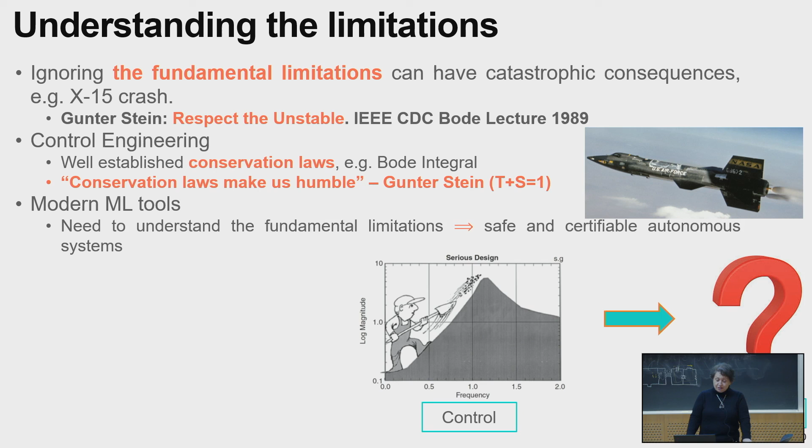So in control theory, we know very well how to trade off performance for robustness, and that T plus S equals 1 is never going to change. My feeling is that in the machine learning community, we still haven't found the conservation laws, right? And in machine learning, it's mostly one message: give us all the GPUs, all the labels, all the ground truth, we can learn everything. But it's not like that.

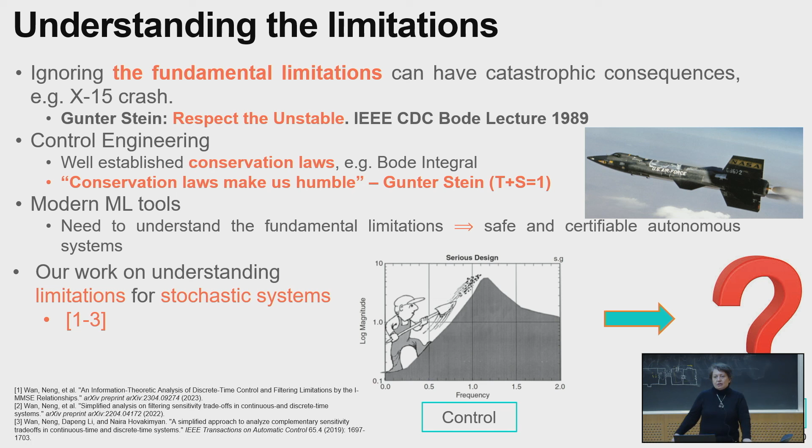So I had one student who was interested in looking into fundamental limitations for stochastic systems. He defended his dissertation last year, went back to China, unfortunately, he was just attracted from there with significant offers. And these are fundamental problems to keep always in mind. There are fundamental limitations that must be well understood before we deploy any solution involving or not involving machine learning on a safety critical platform.